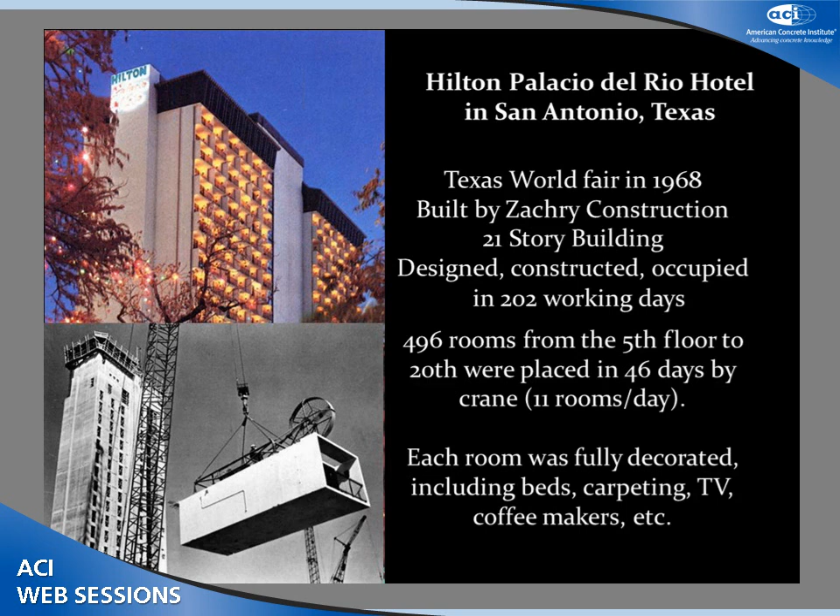Using prefabrication and modularization technology, they were able to finish the entire construction project, from design through construction to opening the hotel for customers, in just 202 working days, which is an amazing result.

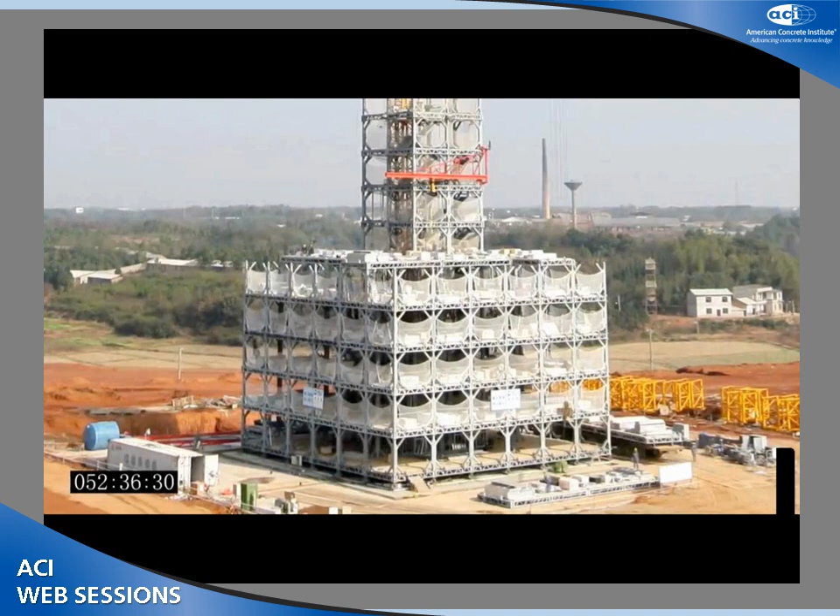Now, in 2011, there was another case of prefabrication technology, this time in China. In Hunan, China, one construction company, I believe Broad Sustainable Building, built a 30-story building in just 15 days using prefabrication and modularization. They uploaded a video on YouTube, so you can watch it and see how they put up a 30-story building in 15 days. This is just a snapshot of their video.

What they did was prefabricate sections of the floors in a controlled factory, bring those floors to the job site, and lift them into place using the crane. They were able to stack up these prefabricated floors in just 360 hours. They worked 24 hours a day to meet the 15 days for completion, and it's an amazing project.

Let's see if the video is working or not. Okay, obviously it is not working, so let's skip the video. If you go to Google and search 30-story building, 15 days, you should be able to find this video clip, and you can be amazed as I was.

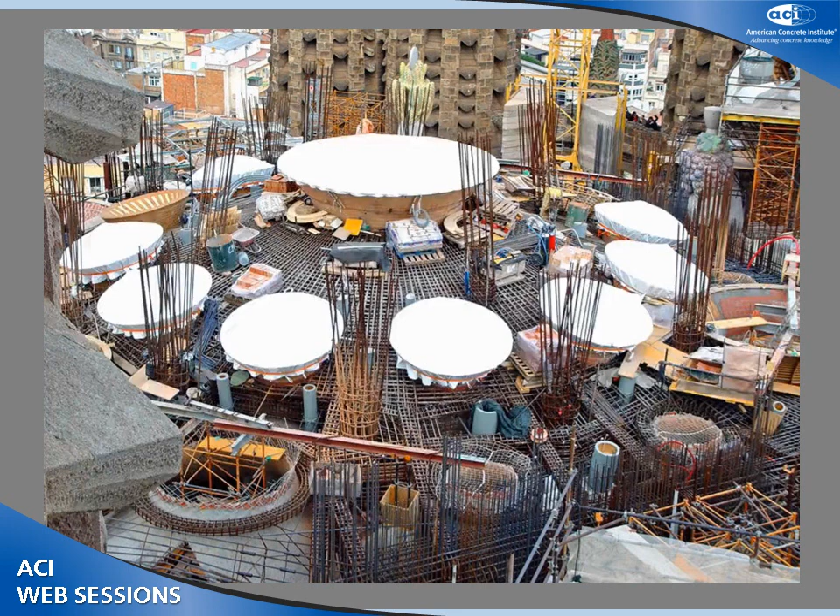All right, now let's talk about our project, which is about cast-in-place concrete. In the two cases I gave you, they used concrete, but they fabricated everything in the factory, so they didn't have to handle this situation on the job site at all. But in many cases, when you are using cast-in-place concrete construction, this is what you have on the job site, right? With this situation, can you possibly utilize prefabrication or modularization technologies?

Believe it or not, some companies have tried to use prefabrication or modularization technologies with cast-in-place concrete. They prefabricated some metal attachments, brought them to the job site, and attached them to the concrete embeds. Then they can speed up the process of putting up the curtain wall of the buildings, things like that.

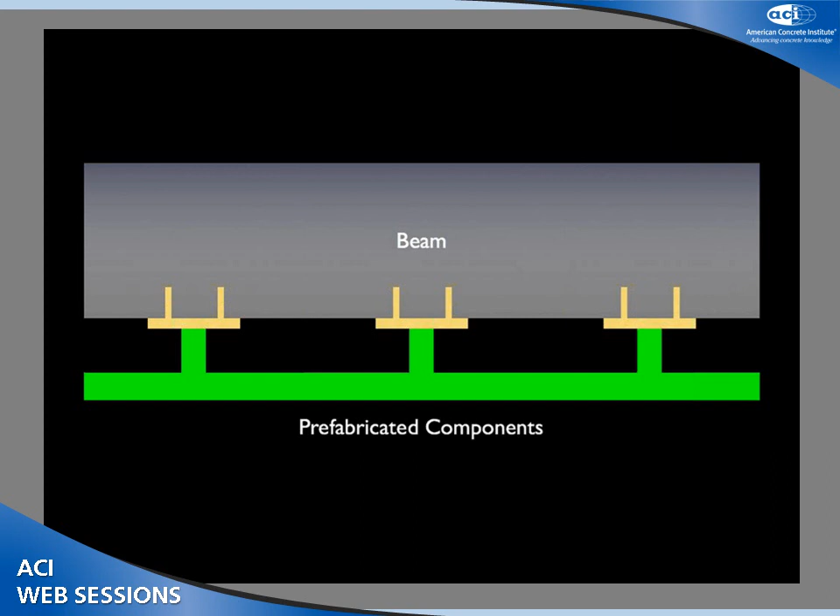Right? This is an ideal situation. What's going to happen in a real situation is, by the way, this. The forms are getting relocated in the process of putting in the fresh concrete, and then the location of the embed is also going to get relocated as well, because the forms are kind of getting twisted.

So if you want to put the same prefabricated metal components on this wiggled concrete beam, you will end up adding more metal to the leg, or you may have to cut the leg to some extent to get this one matched perfectly to the concrete wall. Obviously, this is going to ask you to do more work on the job site, and at the end of the day, you might be thinking, why do we go with prefabrication if we have to work on the job site anyway? Right?

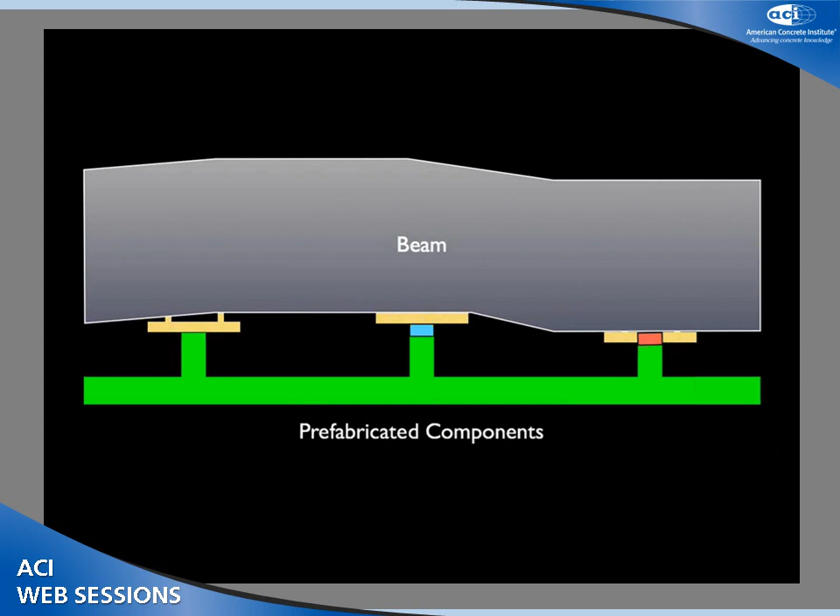So the question is, can we inform ourselves of this situation as quickly as possible, probably through the building information model, so that they will get the updated building information model, and then they prefabricate their metal attachment using the updated building information model. So the question is, how can we collect the data of the existing status on the job site quickly and then bring them back to ourselves?

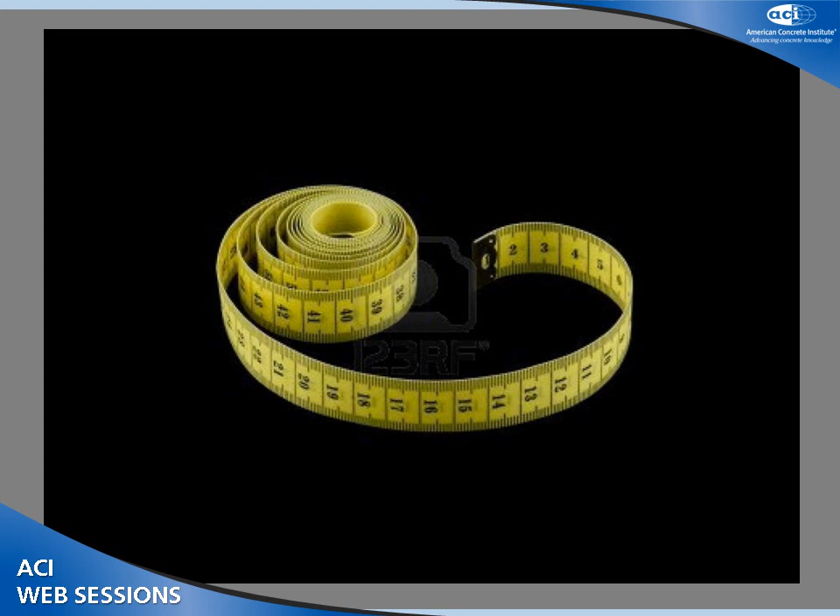Normally on the job site, to see how well you did, you were using this tape measure to get the dimensions of the structures, things like that. I don't believe any of you believe that this is something that you want to use to bring that status back to yourselves. What you may want to use is something like this.

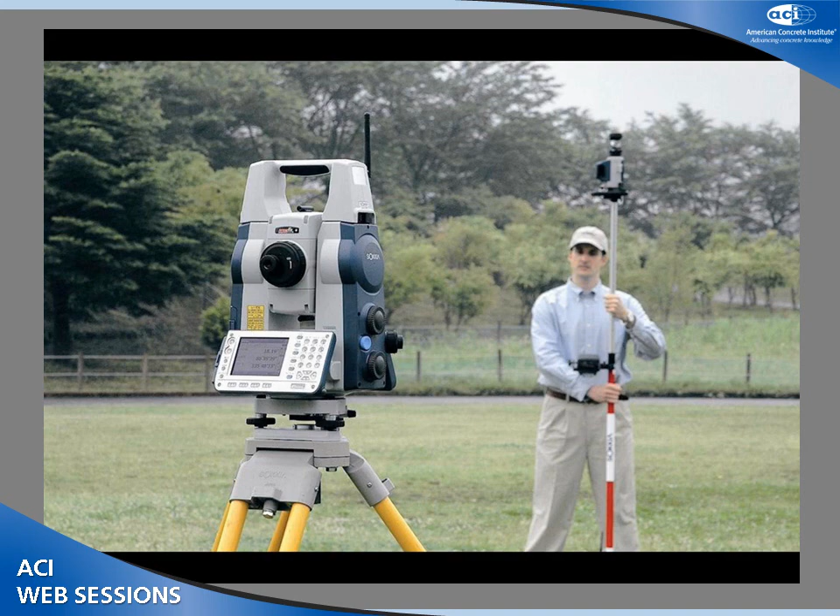What you're looking at is a robotic total station, which uses a laser scanner to collect data points or to help you identify the point data on the job site. This thing is automatically targeting using the laser scanner, and it can also get information from the building information model for the location of the points. The robotic total station can be utilized to check elevations, locate columns, walls, and things like that.

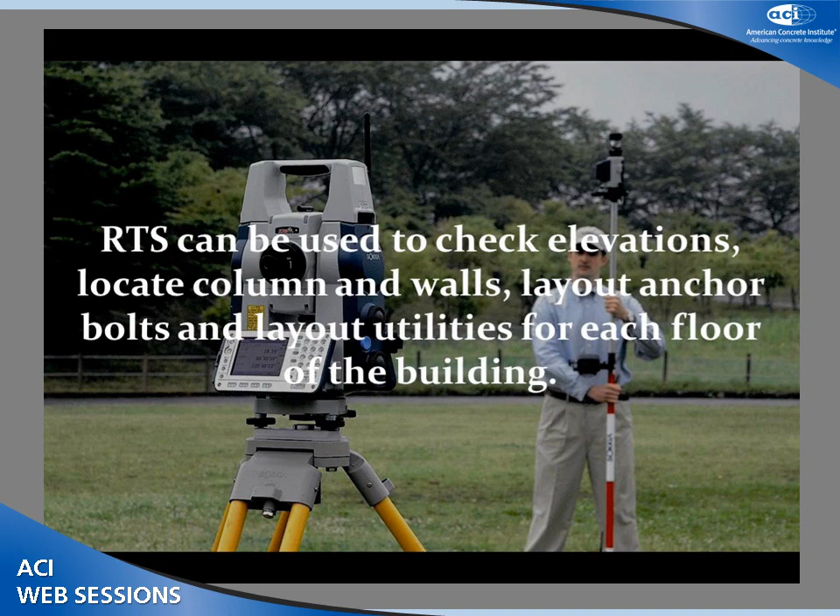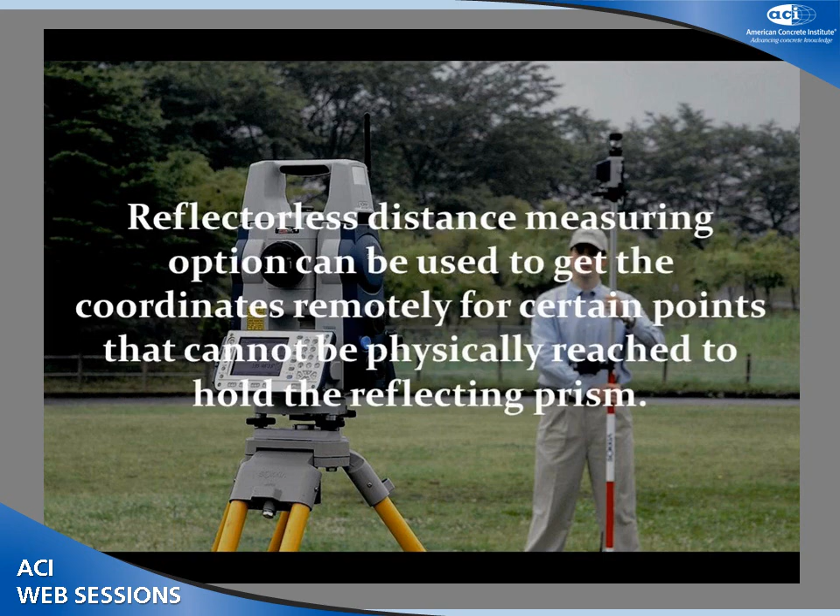So it's a pretty good tool that we could utilize to get the status from the job site and then bring it back to ourselves. And the reflectorless distance measuring option is something that you may want to pay attention to, because it's going to help you collect the point data from the job site even from a distance.

Wondering how far we could go with this robotic total station on the job site, the research team at Texas A&M University teamed up with Skanska USA Building to test 2 major robotic total station technologies, and see how fast they could collect the point data from the job site and bring it back to ourselves, so that subs can enjoy prefabrication methodology for the projects.

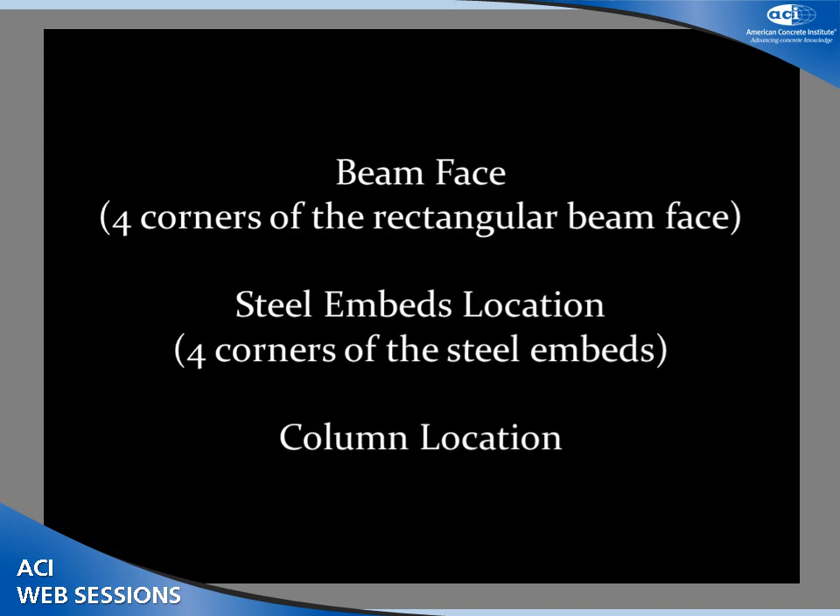We wanted to increase our knowledge about the robotic total station from the construction manager's point of view. We invited 2 main technology vendors, and we used those technologies for an ongoing project at Texas A&M University. What we asked those 2 vendors to do is to collect the data from the beam face, the steel embed location, and the column location. So we asked them, hey, find out the location of these objects as quickly as possible.

So what they did was they brought their machines and actually implemented the task. As you see here, both of them were able to set up the system in about 10 minutes, and they collected points from the beam surface within 5 minutes. For the embed, they were able to detect more than 1 embed in 1 minute.

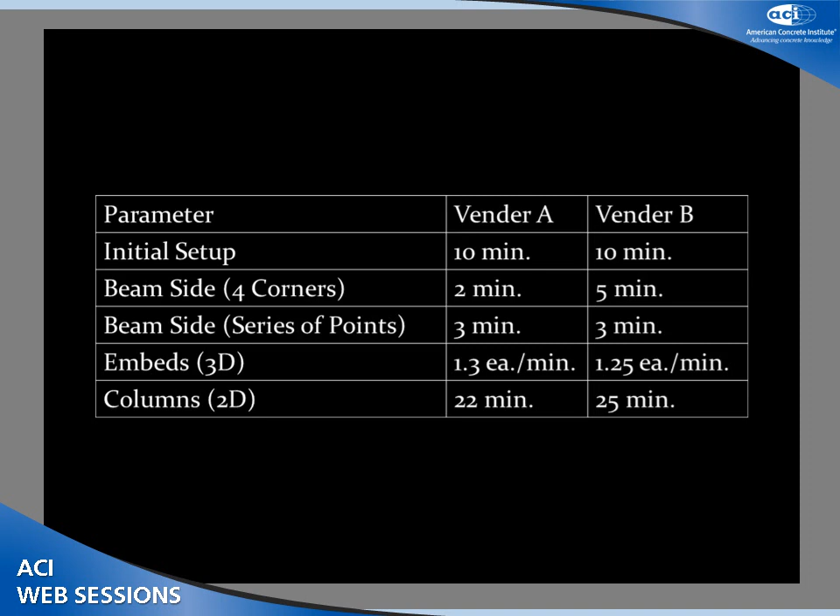But for the columns, I saw them spending more time, because they had a hard time finding the line of sight between the mother station and the column. So they ended up spending over 20 minutes to locate 1 column. But overall, their result was amazing.

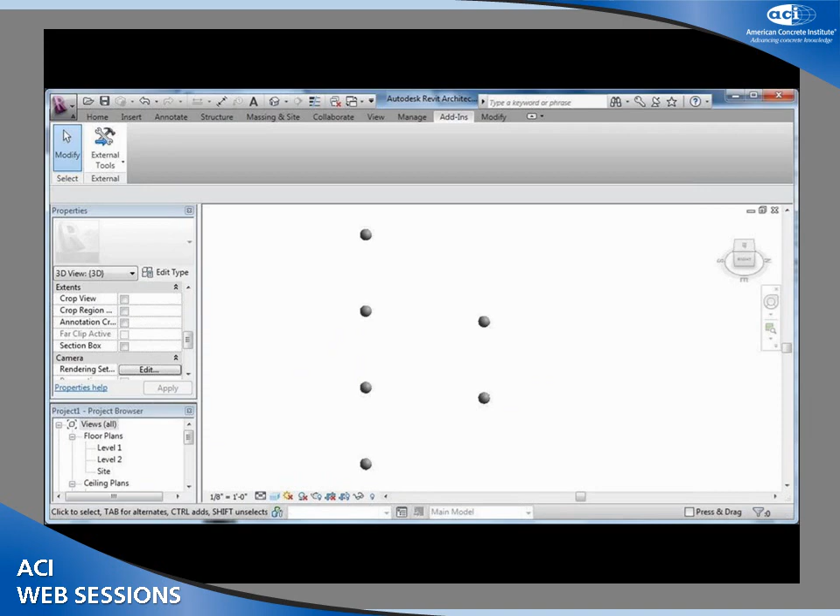The next question we had was, now we collected data points from the job site, how can we bring that data back to the building information model? For that we developed a small plug-in application, which collects the data and brings it back to Revit in this case. This application takes the data from the text file and brings it into Revit.

Combining these points with the existing model, you can get something like this. So you can visually check how accurately you built your building on the job site. And with this information, you can inform your subs what they are supposed to do for their prefabrication processes.

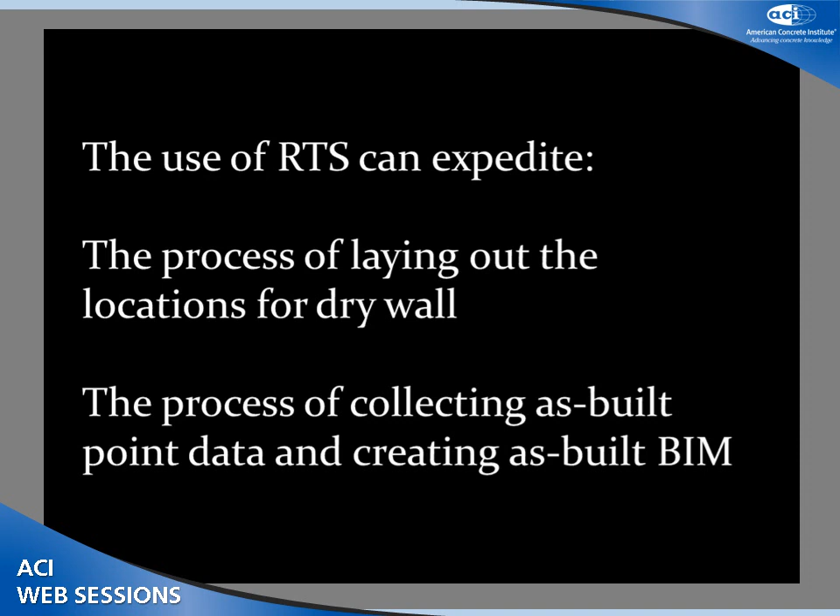So this research helped us understand the step-by-step procedure of using the robotic total station. We confirmed that the robotic total station can expedite the process of laying out the location for the drywall, and it also speeds up the process of collecting as-built point data and creating an as-built building information model.

So the conclusion: if the as-built building information model can be created in real time as the project is moving on, then it might be reasonable to expect that the as-built building information model would help project managers identify potential problems and make proactive decisions to prevent schedule delays.